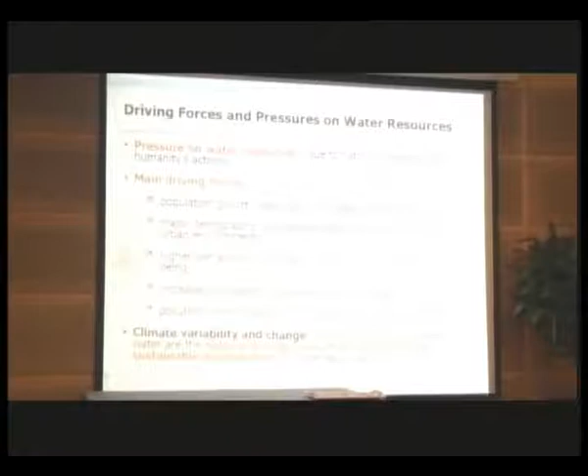And afterward, I think we can listen from our moderator himself, Mr. Green Matthias, who will touch on the climate change topic and the issue of water resources in our country.

Basically, our country, as the first few slides show, has plenty of water resources, excesses of water resources, but at times we have shortage due to drought conditions. The main issues here on water are pollution, as well as the coming climate change issue, which will affect and influence the water resources.

The water access: we are very fortunate, our water quantity is very high, but unfortunately 60% of the annual rainfall, that means the quantity of water, occurs between November to January, and this causes flooding to the coastal areas and also to the riverine areas.

And 9% of the areas of our country are flood prone areas, and shown on my right are the photos of the flooding.

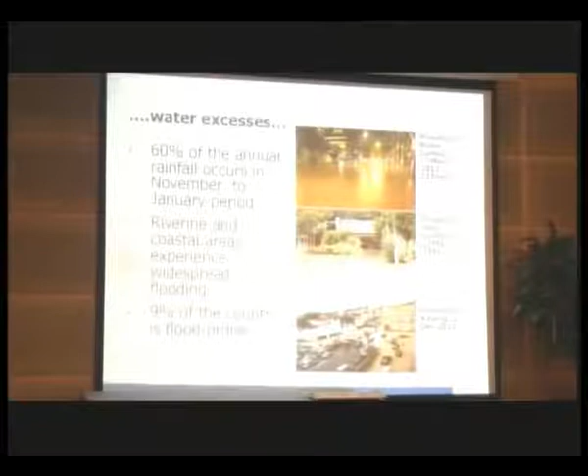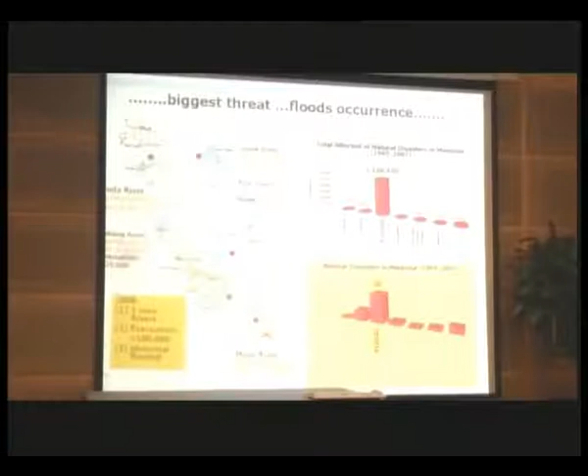The biggest threat from this heavy rainfall are actually flood events. From the statistics of disasters from 1965 to 2007, we have a list of disasters: drought, epidemic, landslide, wildfire, windstorm. But the most critical are flood occurrences, which affected more than 1 million population and over 30 events during the period.

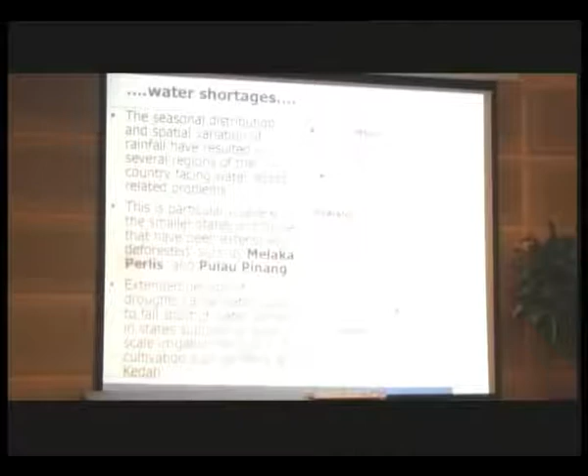And also the problem of water shortage, which occurs severely in the small state areas: Melaka, Perlis, and Pulau Pinang, whereby the drought period extended and caused water supply problems to these states.

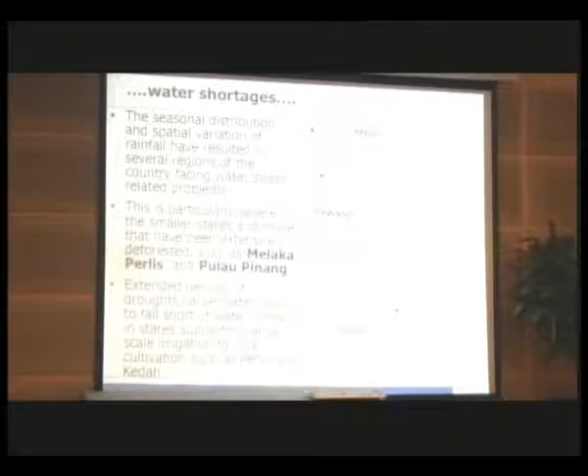On water pollution, the issue is on point and non-point sources. From the study, waste is dumped from the Klang Valley into the rivers. Statistics show that 60 tons of waste was dumped daily into the Klang Valley. Also, our study shows that out of 90 lakes and reservoirs, they are eutrophic, meaning polluted due to fertilizers and pesticides. This will impact the cities, agriculture, and land clearance, which will influence our water supply.

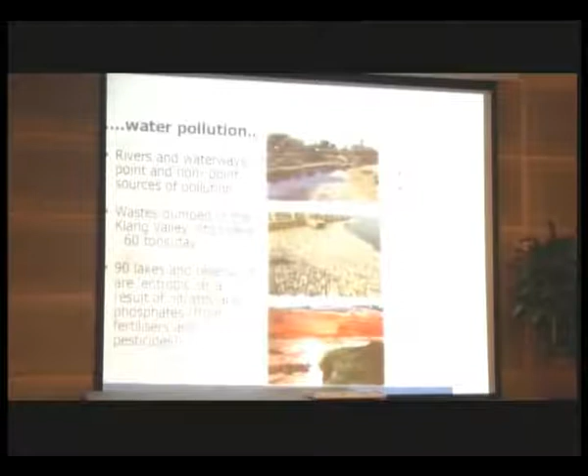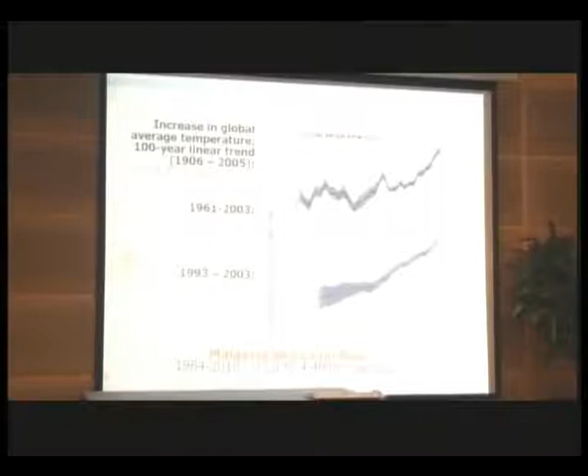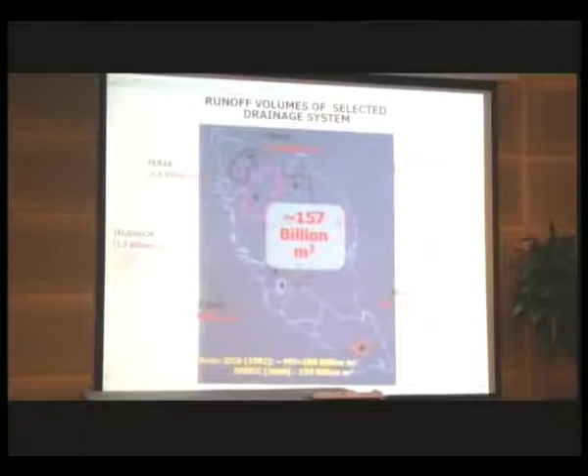The runoff volumes for the selected drainage system from the previous study show 150 billion cubic meters of water, and the future estimated 159 billion cubic meters of water.

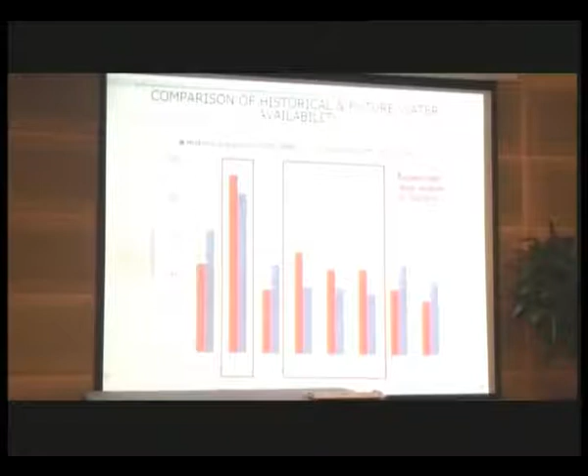This is a comparison between historical and future water availability from our study, whereby blue is the future runoff and green and red are the historical runoff. We found out that certain areas will be facing less quantity of water, for example in Terengganu, Dungun, and Johor, as well as in Selangor.

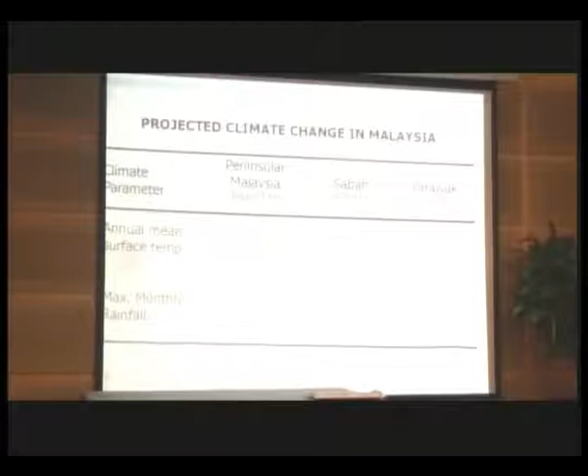So this gives a dimension on the projected climate change and overview. Now I come to the overview of the rainwater harvesting system. I think this rainwater harvesting system is actually a very basic methodology, traditionally used in our kampung-kampung, in villages, from the very old days, and I think this is still being practiced today.

A little bit of background for the rainwater harvesting: in 1998 we experienced a very bad drought, where so many people, especially in Klang Valley and Malacca, were affected by this condition, facing disruption of the water supply.

This undoubtedly created a surge of interest in rainwater harvesting, and following that, in May 1998, the Ministry of Housing and Local Government expressed the government's interest for houses to be designed to include facilities for collecting rainwater. In June 1999, the Ministry of Housing and Local Government came up with a guideline on the installation of the rainwater collection and utilization system.

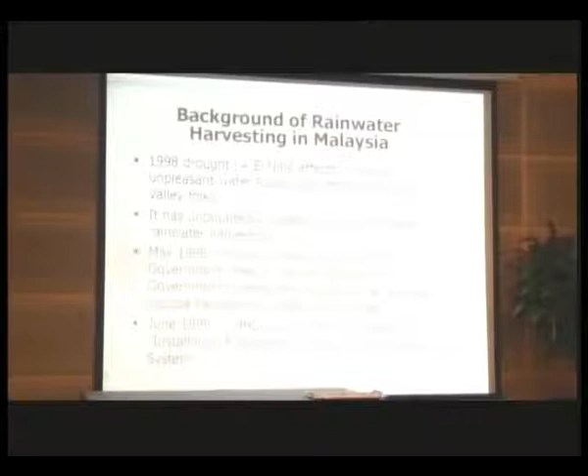In 2007, our National Water Resources Council approved the usage of rainwater to be practiced, and the guideline included regulation for building planning to include rainwater harvesting.

So I think most of the architects present here are more aware of this regulation, and the review of the rainwater harvesting system guideline was produced by the Ministry of Housing and Local Government.

And also the government carried out a conservation awareness campaign, a water conservation campaign, and a comprehensive action plan by the ministry to make sure that rainwater harvesting can be implemented effectively and extensively.

Further to that, the government didn't stop there, and in November 2007 the cabinet meeting agreed to make installation mandatory for new developments. In 2011, the National Council for Local Government approved the regulation in the building bylaw, and in November 2011 it was gazetted, requiring new semi-D bungalows and government buildings to install rainwater harvesting systems.

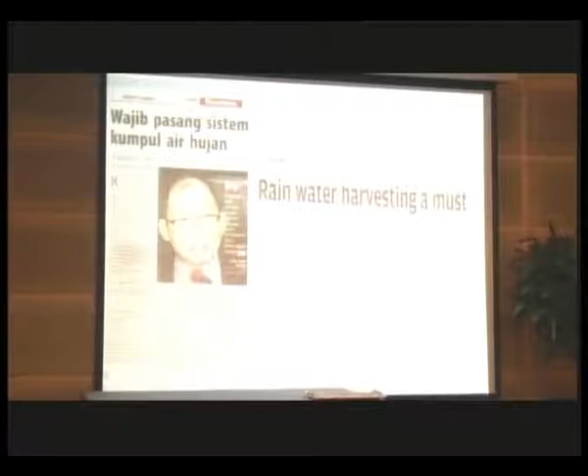This came out on the 14th of June 2011, and as well in the 2012 budget, the government has provided 20,000 water tanks costing 52 million to Sarawak, which benefited 100,000 people. And this program will expand to Sabah with an allocation of 50 million. This statement was made by our current PM sometime last year.

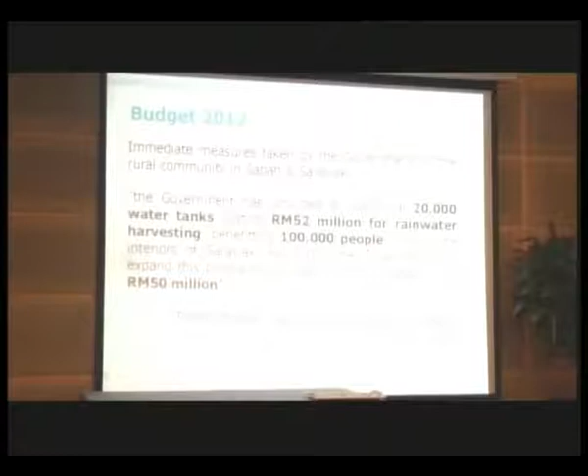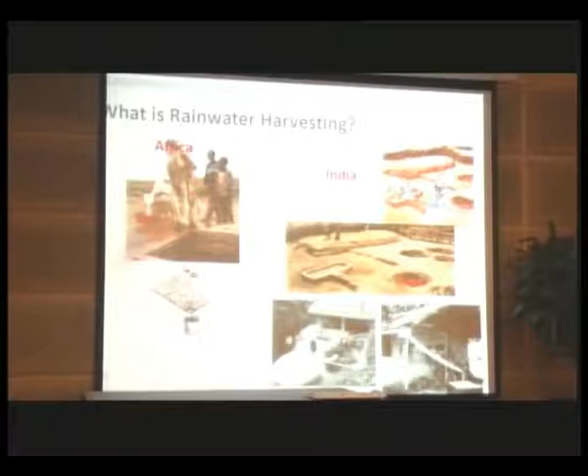So the concept of rainwater, I think no need to elaborate further, because those are very basic. You collect the water basically from the roof, or maybe from the open space area, into the container, and traditionally they directly use the water like this to supply the water to the cows and all those things. This is another concept of rainwater harvesting.

This one is also a similar thing. The rainwater harvesting captures the rainwater through basically the roof and into the tank. The only thing I wanted to highlight here is the rainwater harvesting system is normally currently used for non-potable purposes like landscape irrigation, toilet flushing, and maybe washing cars. But besides that, rainwater can also be used as drinking water, and can be commercialized as drinking water with proper treatment.

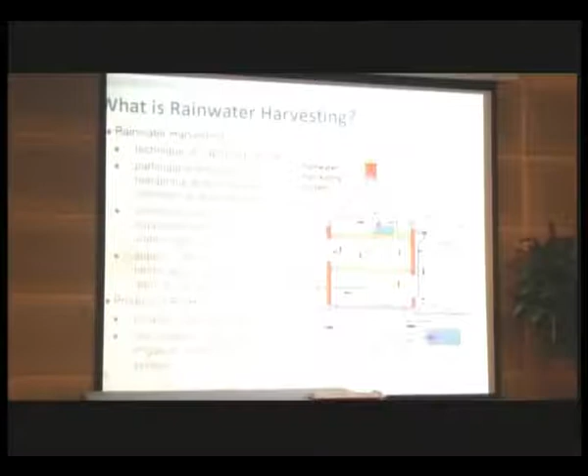These are the systems for rainwater harvesting. We have the roof catchment to collect the water, and this has to go through the so-called first flush system. This first flush system lets go of the polluted portion of the rainwater from the roof, and then it goes into the tank. If the tank is underground, then it requires pumping. But if the tank is high enough, then no pump is needed, and it can be directly used.

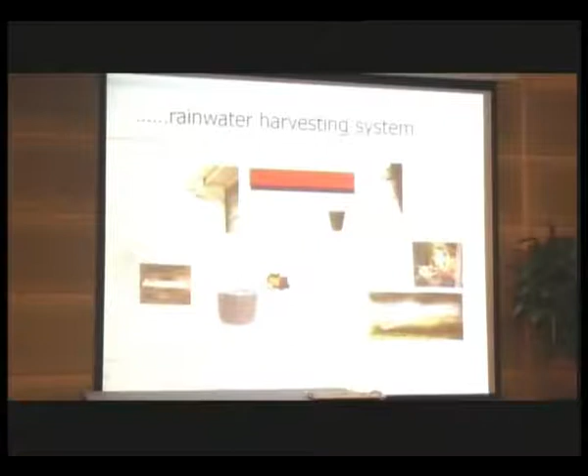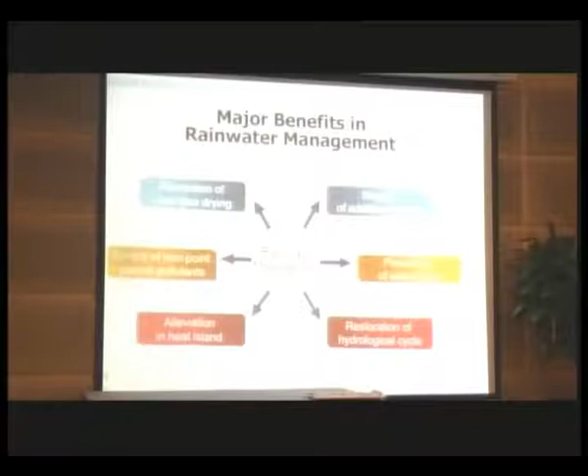The benefit of rainwater harvesting is not only for water supply or non-potable use. Besides the supply of additional water, it can also serve as flood prevention, especially in urban areas, and also restoration of the hydrological cycle, alleviation of the heat island, control of non-point sources, and prevention of dry flow of the river. This is an example of additional water sources, whereby rainwater is collected for industrial and domestic use.

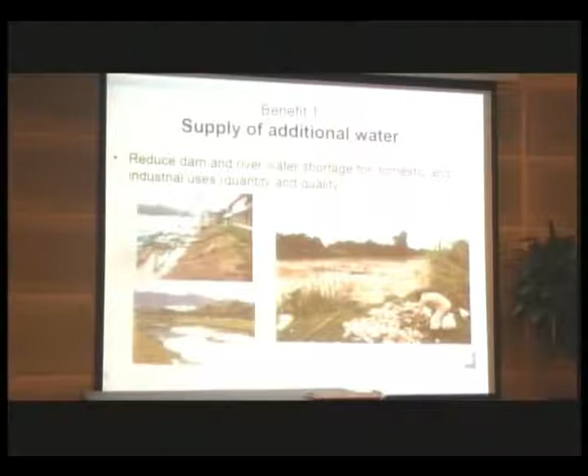Normally this is collected on the roof, and for prevention of urban flooding, the installation of rainwater systems at homes or buildings will help reduce the runoff. So if in a very large quantity, let's say in a housing estate, all the individual houses collect the rainwater, then it will definitely reduce the runoff into the drainage system during a storm, and thus reduce the occurrence of flash floods.

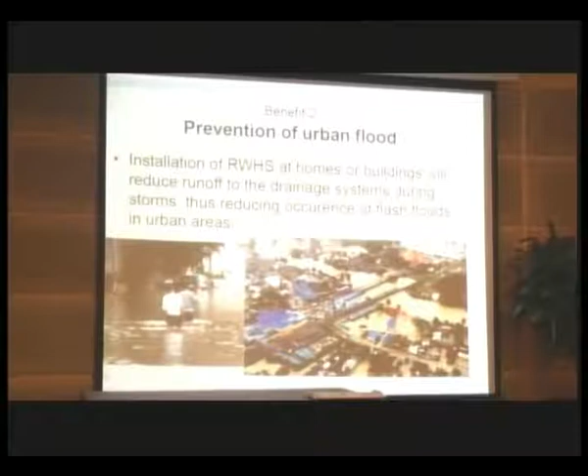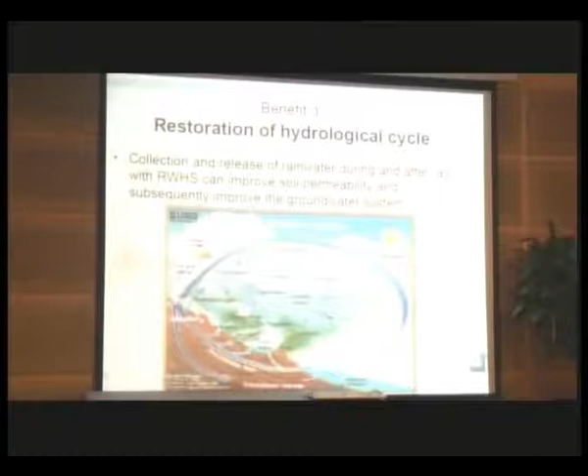For the purpose of restoration of the hydrological cycle, the water which is collected can be released. The collection and release of rainwater after the rain can improve soil permeability, and subsequently will improve the groundwater system.

For the alleviation of the heat island, rainwater poured on the hot and dry ground can reduce the heat on the earth's surface, and also on the roof - the green roof, which uses rainwater to water the roof and the plants on the roof. This also will reduce the heat island impact.

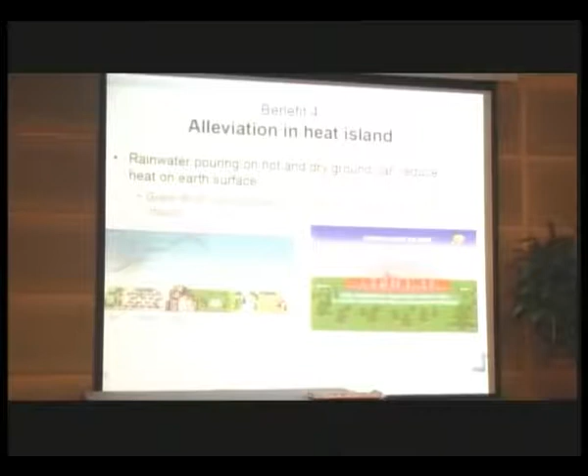For the control of non-point source pollution, the concept of the rain garden is introduced, whereby this rain garden can be used as a filter of the pollutant coming down from upstream into the drain, being filtered by the rain garden. The outflow from this rain garden has gone through filtration, and clean water will pass through. This is basically very close to our concept of SMA that is being implemented, the MASMA.

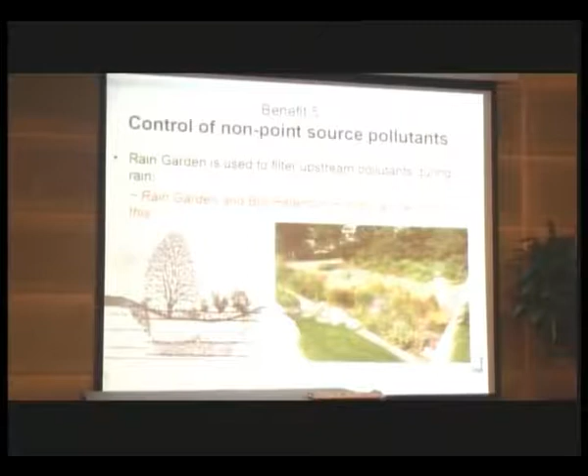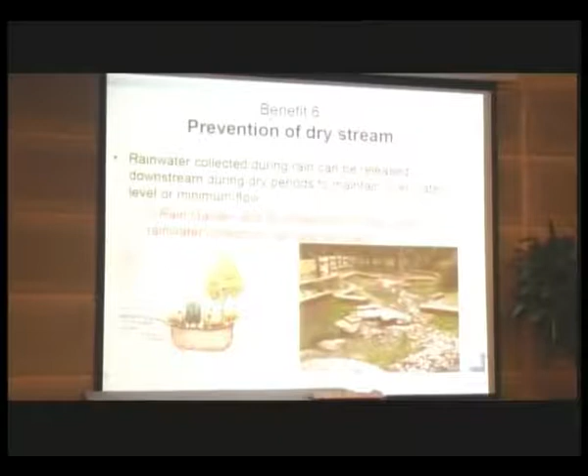And then for the prevention of dry streams, the rainwater can be collected and only released downstream during dry periods to maintain the quantity of water flowing through the river. And now I will go to the research experience in rainwater harvesting.

So we have carried out research in one of the terrace houses. From the data collected, the research was carried out in this double-story terrace, whereby rainwater is used for toilet flushing and general cleaning. The occupants of this terrace house, 6 people, are located in Taman Wangsa Melawati, Kuala Lumpur.

From the data and the study we carried out, it shows that 34% of the household water supply required from the public source can be saved. 34% is considered quite high.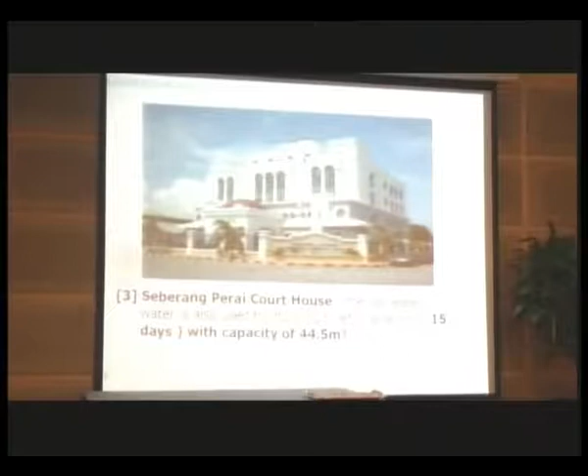Seberang Perai Court House, the harvested water is also used for flushing the toilet, saving up to 15 days with a capacity of 44.5 meter cube. And this is for the industrial Waterco plant. The toilet uses rainwater for toilet flushing, garden watering, equipment cleaning, and filling up the cooling towers as well.

And they can save up to RM 800 to 1,500 per month based on the current tariff.

And now for water shortage prevention, we carried out rainwater harvesting for the longhouse in Sarawak to supplement the existing river water supply.

We designed it to achieve a 21-day water supply duration. Currently they are getting a 21-day water supply duration, and we are monitoring the system there. The reliability of the rainwater harvesting there is 85%.

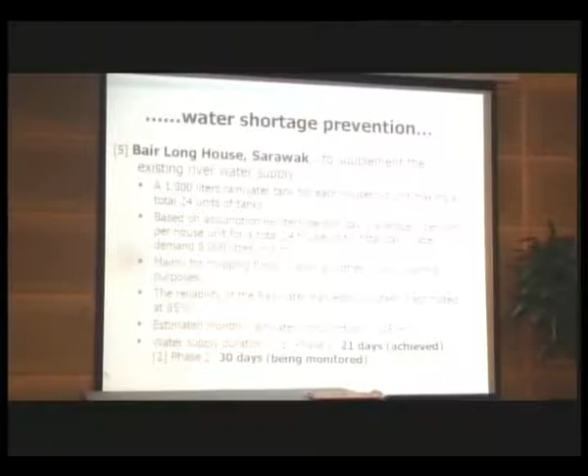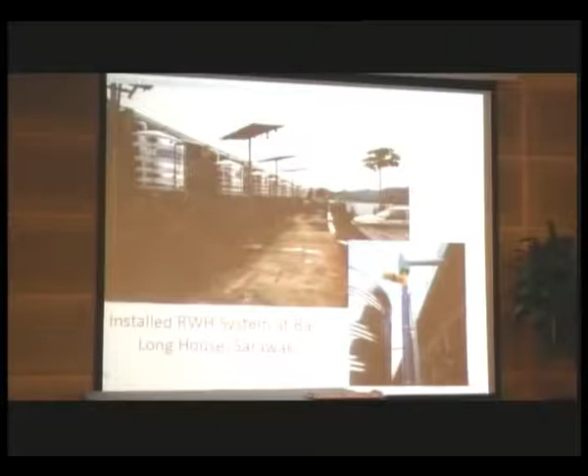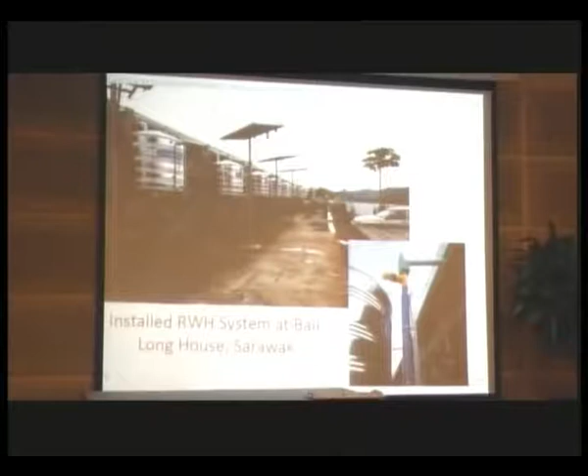These are the photos showing the tanks for the rainwater harvesting at the longhouse in Sarawak. We also have the details here. This white-colored part is the pipe into the tank, and this is another view.

Actually, after phase 1, we improved the system to supply 30 days. Before it was 21 days, and now for phase 2 we upgraded and increased the capacity up to a 30-day water supply system.

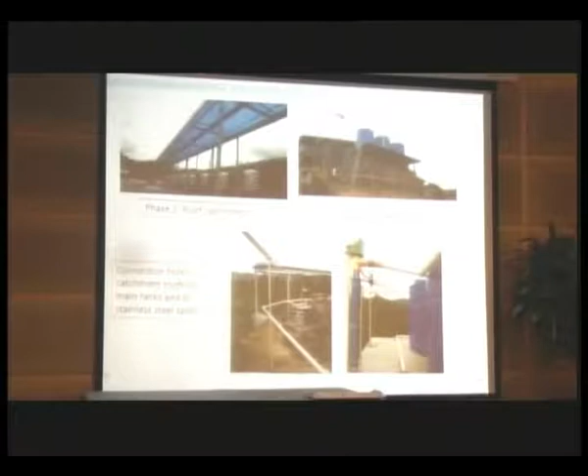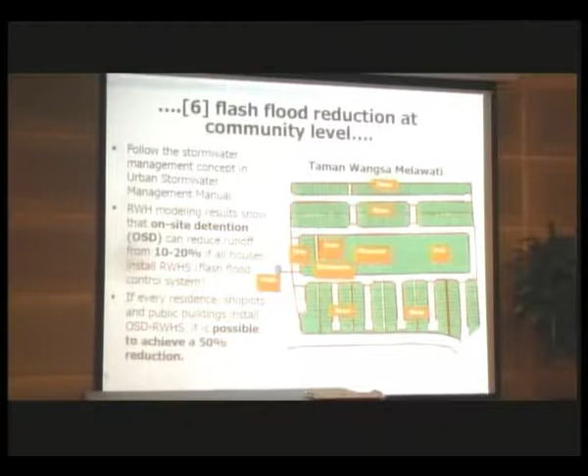And also flood reduction at the community level. We also carried out a study on how rainwater harvesting can influence the flood condition.

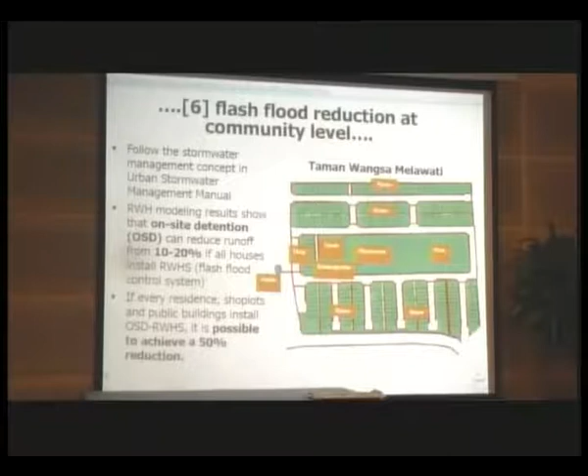So at the same location in Taman Wangsa Melawati, we carried out the study, and from our study, if every resident, shop lot, and public building installs on-site detention plus the rainwater harvesting system, the possibility to achieve a 50% reduction in flood control is actually very significant in reducing the flooding.

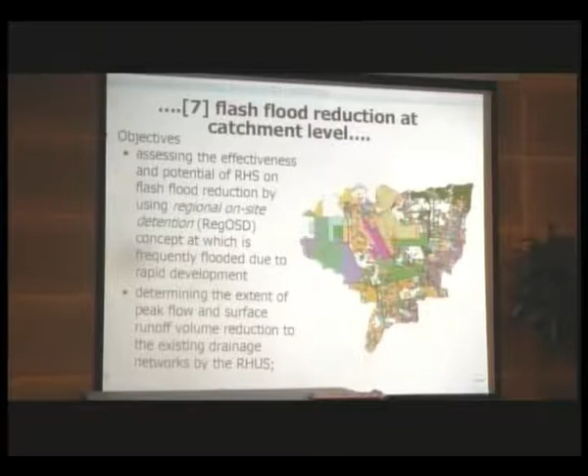Now we are carrying out a study to look at the reduction of flooding at the catchment level. As shown here, we are assessing the catchment level to study the reduction in flood using rainwater harvesting.

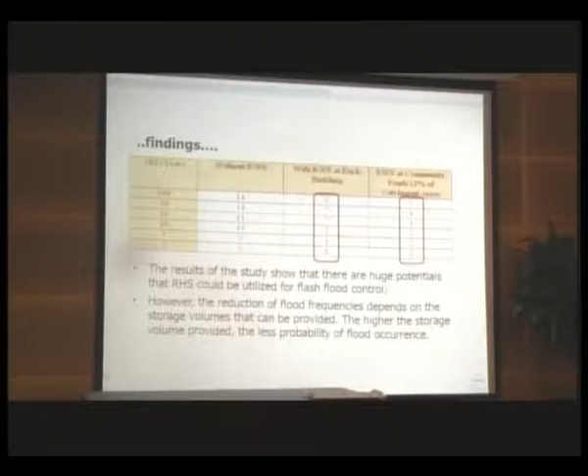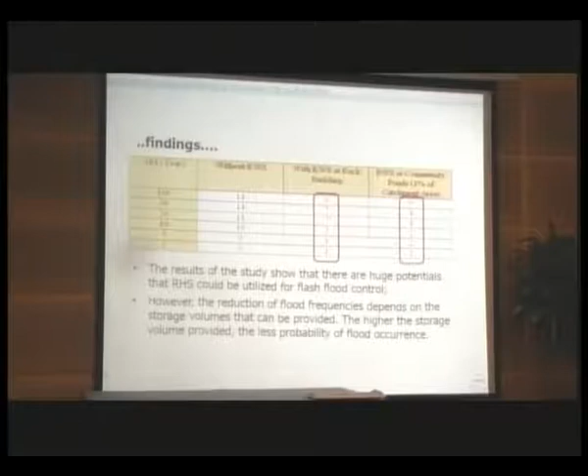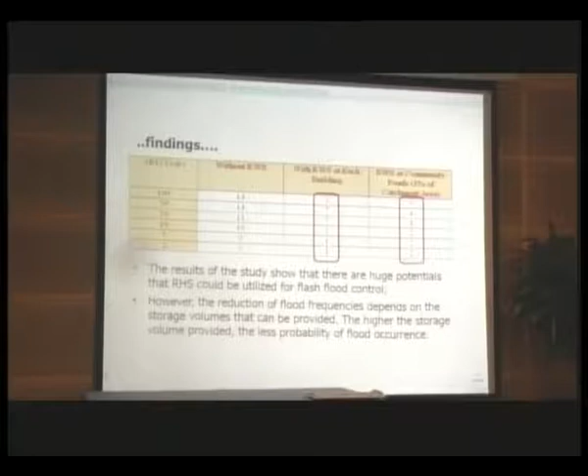The finding from this study: we found out that the occurrence of flood events at each building, we managed to reduce from, for the 100 ARI, 14 events to 8 events, and so on. The more frequent one actually reduced very significantly for the 5-year return period.

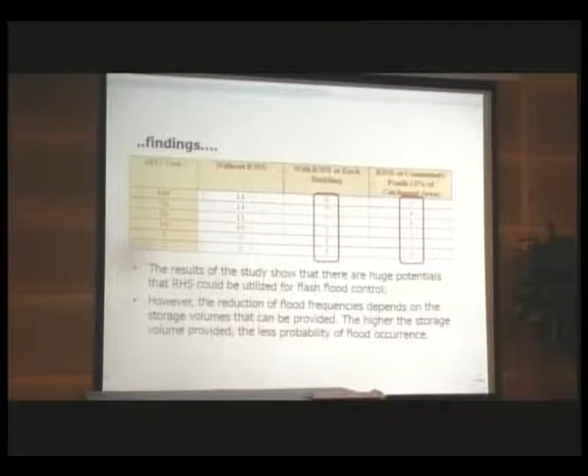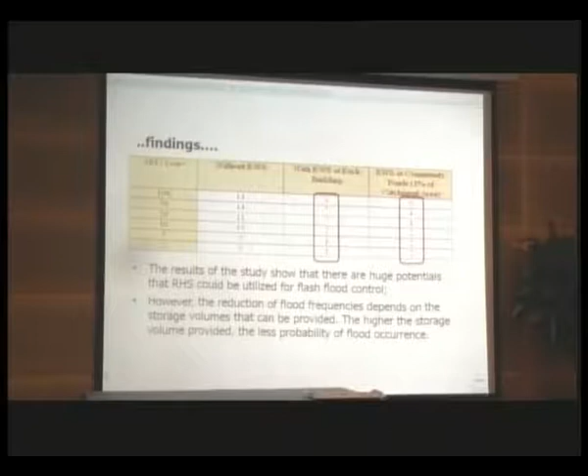Without the rainwater harvesting, the occurrence was 9, and with the rainwater harvesting it reduced to only 1. Similarly for the 2-year occurrence ARI.

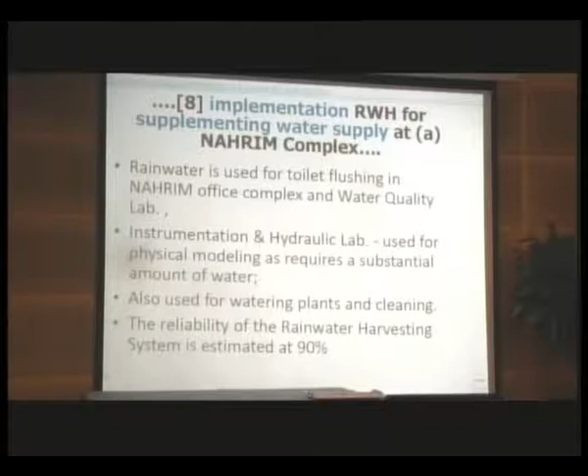Also in our complex, we actually practice the rainwater harvesting system, where we utilize the rainwater for toilet flushing, as well as for uses in our physical modeling lab, where we use a lot of water. So we harvest the water and use it during our experiments and testing in our lab. The reliability from our study on the rainwater harvesting is estimated at 90%.

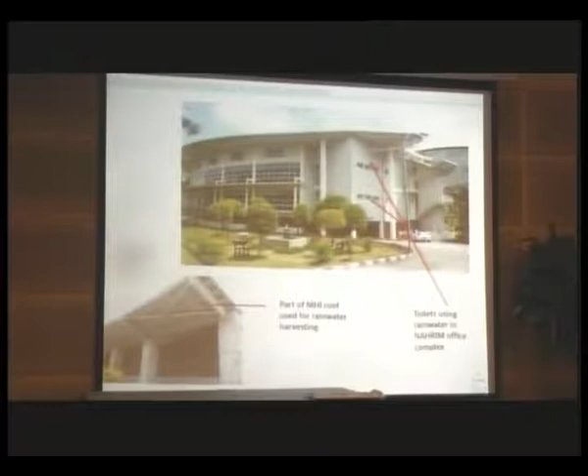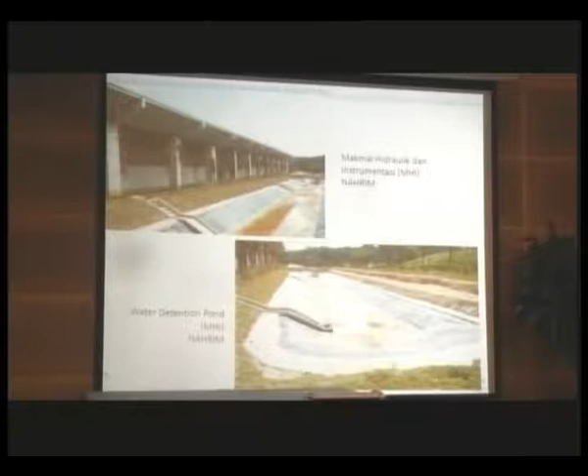These are the buildings: the administration building, and this is the lab building. The rainwater is used in the toilet as well as for lab facility purposes. For the lab experimental purposes, we collect the rainwater into the pond, then pump it into our storage inside the lab, and by gravity transfer it into our facilities for experiment purposes.

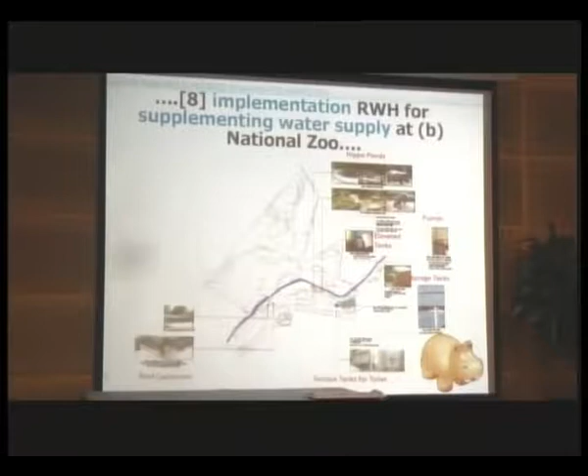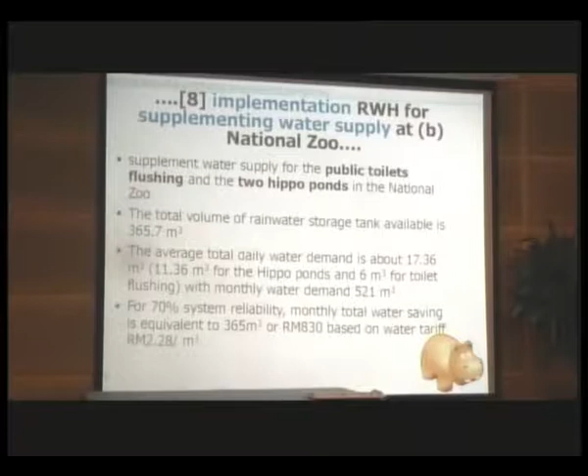And also the rainwater harvesting being implemented at the National Zoo to supplement the water supply for the use of the two hippo ponds. We supplement the supply for the public toilets, and also the two hippo ponds. The reliability is 70%, and from our calculation, we managed to save around 830 ringgit monthly.

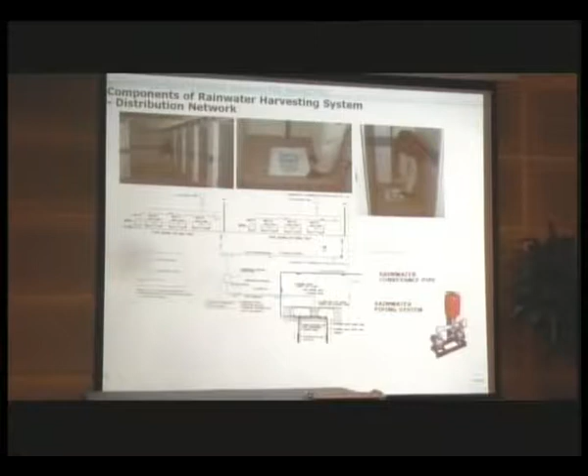Another rainwater harvesting project that we carry out is for the mosque in Taman Bukit Indah Ampang, whereby we construct the rainwater tanks just underneath the parking area, and the rainwater is being used for toilet flushing in the masjid. So those are the list of the rainwater harvesting projects that we have in NAHRIM.

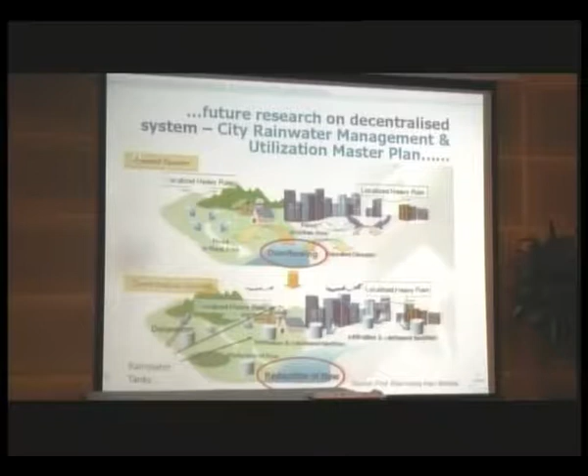For future research, we can look more into the management and utilization master plan. If we compare currently, once the rain comes down and directly flows into the river, the river couldn't take the quantity because of the very fast flowing, especially in urban areas, where all these concrete jungles are there, and their retention of water is very low. If we introduce the detention pond, this can help reduce the flow directly into the river, which will in result alleviate the flooding problem.

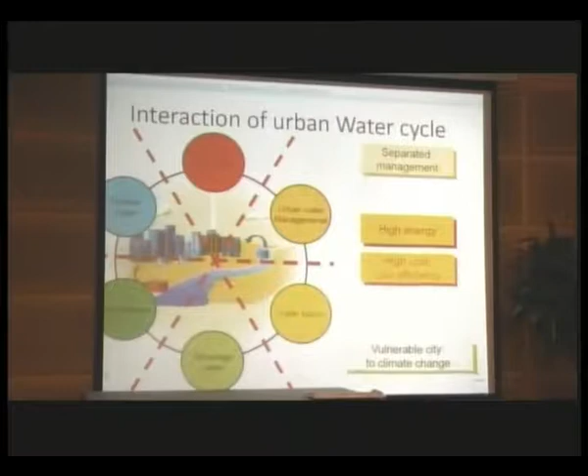It's a similar thing. Currently this is our practice, whereby when the rain comes it directly enters into the river, but if we practice using this cycle here, it may help alleviate the flood problem besides the water resources, water supply.

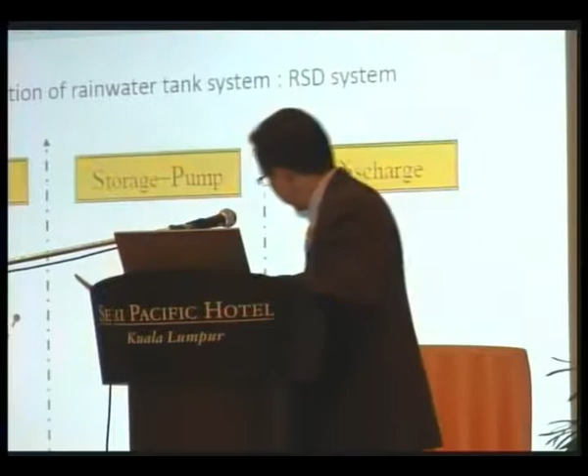Comparison, another graphical comparison between the conventional, whereby water will directly go into the drainage and fill up the drain pipe, and if we use this storage pond, it can help reduce the capacity of the storm water drainage, and finally will help alleviate the flooding.

Another study that we carry out is for this area, the Sungai Bunus area, whereby we are studying the possibility of using rainwater harvesting to alleviate the problem of flooding. From our calculation, using the rainfall data, the land use data, industrial, green area, and the tempat untuk home place, we calculated the quantity that can be saved, and the results show that it can help the flooding of the area.

So in conclusion on rainwater harvesting, this is essential for the future sustainable development of the city, and the system can be developed using cheap and efficient technology through further research. Rainwater harvesting is a sustainable approach that can be very cost effective in the long term, and the utilization of rainwater should not be restricted to supplementing the water supply alone.

Besides, as I explained, it can act as a flood reduction measure, and rainwater harvesting in response to extreme climate can ultimately enhance the resilience of human resources due to extreme climate, as we are aware now of the issue of climate change. Lastly, research and development on rainwater harvesting for different purposes and activities are very important and must be carried out.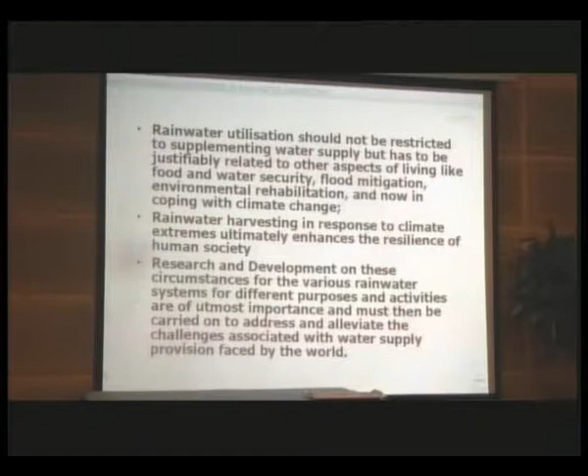Maybe I can kick it off with: what is the main reason that so far rainwater harvesting uptake in Malaysia is fairly limited, and what was the cost per person for the system you installed in the longhouse in Sarawak?

The main reason, I think, is because water is very cheap in our country. So people are not willing to invest because if you want to introduce new things to your properties or buildings, for the rainwater harvesting system we need at least a pump and at least a water tank. Most of our houses have gutters, but we don't have the water tank. This water tank, maybe the issue is the space. If you have very limited space and need to construct the water tank underground, then it will incur additional cost. Maybe that is one of the reasons. The main reason is because our water rate is considered cheap, and especially in Selangor, we have 20 cubic meters free of water. So that is my opinion.

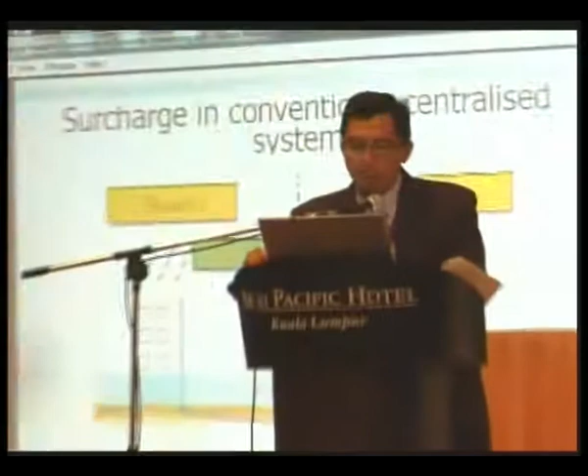What do you think? Yeah, I think it's a good idea. Because from my earlier slides, I'm actually going through this. Sometime in 2011, the National Council for the Local Government actually approved a regulation for the uniform building bylaw.

We should require semi-D houses, bungalows, and government buildings, at least to start off, to kick off using the rainwater harvesting system. The only thing, unfortunately, maybe CREAM has the data on the usage up to date, on what the percentage is, especially for new buildings.

And the idea just now is more on the government side to come up with the rules or regulation. But to me it's okay. It's a good idea, and I agree with that.

I guess what you're proposing would assume that somebody invests in a rainwater harvesting system and then charges less for the semi-free rainwater. But the problem is, in Malaysia, the treated water is already so cheap. Nobody will want to invest. Where are you going to get the money from? You can only invest if you promise a return, unless you've got some charity that wants to pump billions and billions into this without ever getting a serious return.

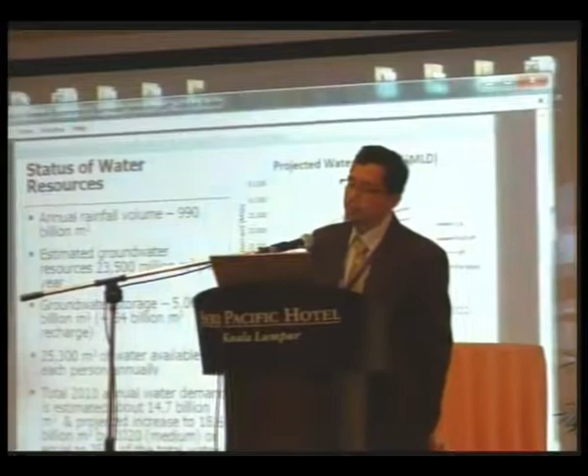Annual rainfall volume is 990 billion cubic meters. That's a lot. How much do we consume per year? I think these are the figures—around 15,000 million liters per day. So the actual consumption is a small fraction of the water coming down. Only basically a few percent—less than 5%. So it's all there. Mother Nature provides for it.

So maybe we have an unsolved question, but isn't it mandatory in Selangor now for certain houses to install a rainwater harvesting system? If I remember correctly, I read that in the paper. Or is that not yet the case? For the semi-D and bungalows—yes, semi-D and bungalows. Okay, so I think for me the conclusion is this should happen in Malaysia.

It should happen. It must happen sooner or later, otherwise the country will lose a lot of resources. What I always think is people want to increase efficiency. And Malaysia—I only know the statistics for electricity—I read Malaysia consumes 40% more electricity than neighboring countries. Even with water, our rate of usage per day is around 220 liters per person, compared to neighboring countries at around 150 something.

Wow, so similar—Malaysia is consuming 40% more water and electricity. I would call it not consuming, I would say wasting. We are wasting so much. My electricity bill is 20 to 30 ringgit a month, so I guess I'm not in that category of wasting, and my water usage is minimal as well. My shower is like, switch it on, make yourself wet, switch it off, soap a little, rinse, that's it, job done. I never use hot water to save electricity, I never switch on the water heater. So those are some small, practical things in daily life that we might do.